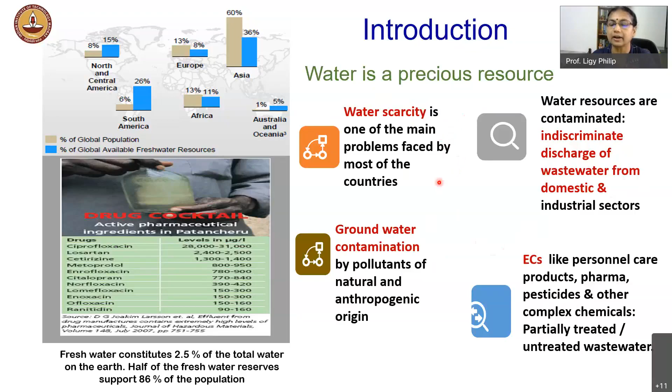There are also water intensive industries like textile and tanneries, with problems regarding water availability and treatment of complex wastewater, where both quality and quantity come into picture. And in rural and peri-urban areas, unprotected surface or groundwater is used for drinking purposes, and most of these sources are contaminated.

When we talk about rainwater and groundwater recharge, the hydrogeology of the locations plays an important role. There is also significant loss of water in distribution systems, and flood and drought frequencies are increasing due to climate change effects. Appropriate management strategies for stormwater to augment water resources are lacking. So if you want to count the problems, there are numerous. There is an urgent need for sustainable management of water resources to provide adequate quantity of good quality water for all - both quantity and quality are very essential.

So when we talk about water and sustainability, water is an integral part of sustainable development.

We all are talking about sustainable development goals and all the things. Water is directly linked to 3 of the sustainable development goals set up by the United Nations: clean water and sanitation, sustainable cities and communities, and responsible consumption and production. All these things are coming under the SDGs set up by the United Nations.

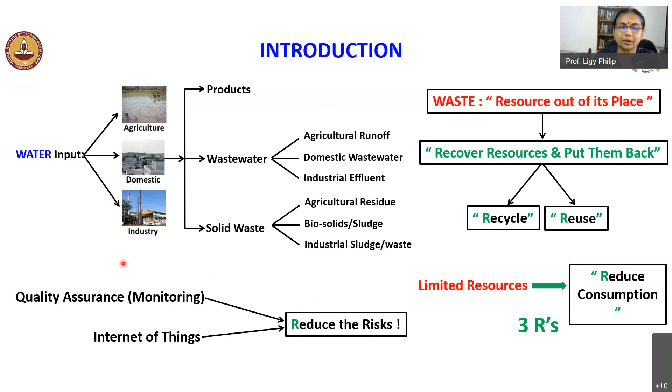But when we talk about recycle and reuse, there is a lot of risk associated with that, because a lot of residual pollutants may be present. So quality assurance through monitoring is very essential. When we talk about monitoring and sensors, Internet of Things and all are coming into the picture.

So, water is interconnected with agriculture, industry, and domestic use, so an integrated approach is essential. Building resilience and reducing risk is essential, and compartmentalization does not work. If I tell you that I am going to work only on wastewater, it is not going to work - we have to have an integrated approach.

So when we talk about sustainable water management, we have to look into agricultural water supply, its quality and quantity for domestic and industrial use, domestic wastewater treatment, industrial wastewater treatment, water distribution, sensors and actuators, integrated water infrastructure, sustainability, resilience, risk reduction, etc. It is a highly interdisciplinary area.

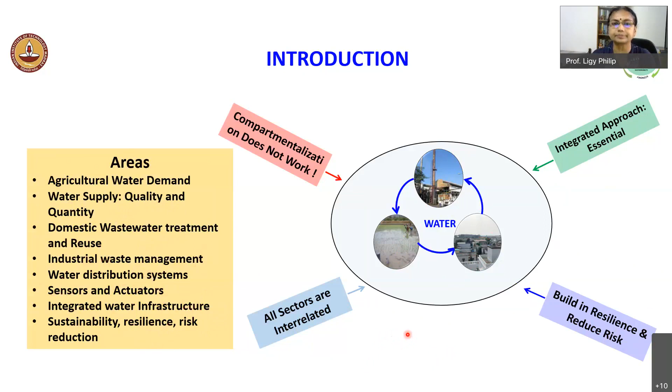So, circular economy for sustainable water - recently we got a prospective Centre of Excellence from IOE of IIT Madras. So we are planning to look into sustainable management of water in a circular economy concept. I'm not going into the details of this one.

So you have rain, surface water, and groundwater treatment - you monitor the quality and all. Then it goes to industry, it goes to domestic purpose, it goes to agriculture, and many other ingredients are added to each thing, and waste is generated. You treat it back, put it back, and the complete resources are recycled within these 3 compartments.

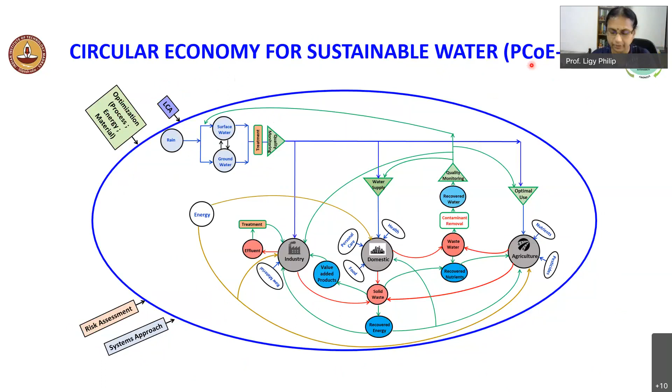And we have to have a systems approach, risk assessment, optimization of the process, energy, material, and life cycle analysis - all these things are needed. This is what we are looking at as part of our PCOE. And as I told you, it is an interdisciplinary problem - we have to have advanced materials, understand the science involved, the technology, and we will be developing a lot of products, which is essential.

Then, we have to take it to market, or if you are developing some technology implementation, social benefit - all these things are needed. So a large group of person skills are needed. We have another center which involves some 9 institutes with IIT Madras leading the effort.

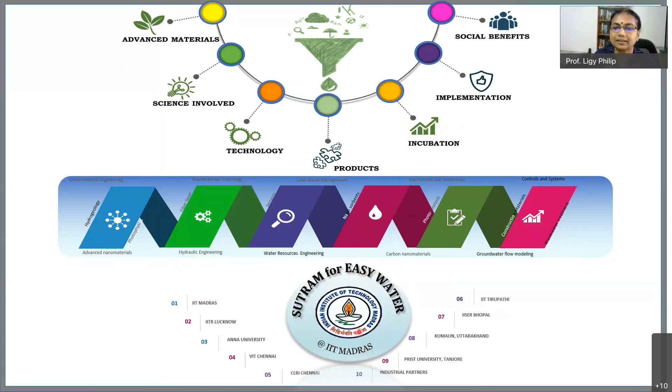This is known as Sutram for Easy Water. It is a Centre of Excellence supported by the Department of Science and Technology. So what we are doing here, I'll quickly go through.

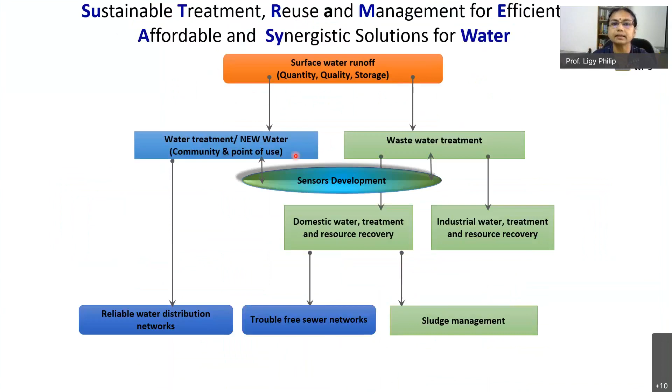Overall, for water management, we are looking into sustainable treatment, reuse, and management for efficient, affordable, and synergistic solutions for water. We have to look into surface water, runoff, quality, quantity, storage, water treatment, new water, community point of use, wastewater treatment, sensor development, domestic water treatment and resource recovery, industrial water treatment and resource recovery, sludge management, trouble-free sewer networks, and reliable water distribution networks.

Then we have to look into reliable and good quality, sufficient quantity water supply for drinking, nutrient recovery, biogas recovery, and salt management. So all 9 institutes are looking into all these aspects.

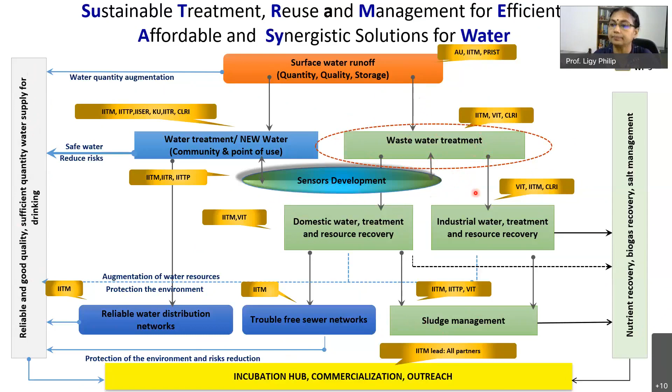Okay, we have done significant amount of work in this aspect. But today's talk, I'll be majorly concentrating on wastewater treatment, and how we can follow this circular economy concept for sustainable water management, with wastewater as a case study.

So the current wastewater treatment scenario is like this. We are generating the wastewater, collecting it, treating and disposing it. Reuse and recovery is very, very little. Though in paper it is there, in actual practice it is very little. Treatment compliance also, in most places it is not meeting standards. Mainly only primary and secondary treatments are there, and the residual pollutants, nutrients removal, etc. are not taking place at all.

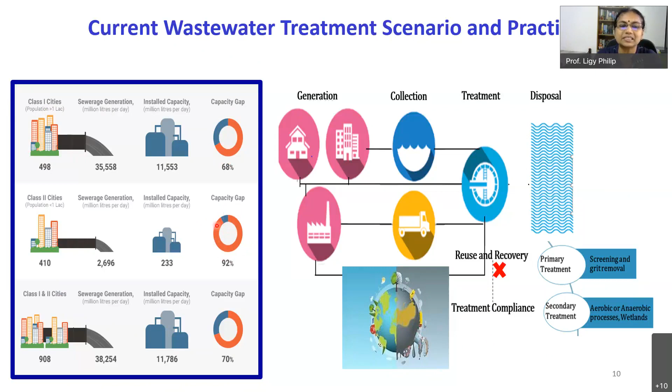So as a result, what is happening? Our water resources are getting contaminated with residual pollution because of the discharge of partially treated and untreated wastewater. If you see the infrastructure available in class 1 cities, we are able to treat around 32% of water, and 68% goes untreated due to capacity gap. When we come to class 2 cities, the treatment capacity is only 8%, and 92% is going untreated. Rural areas have no centralized system; mostly it is on-site sanitation systems.

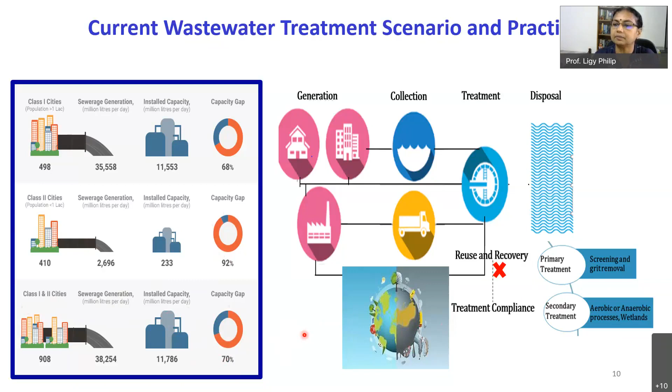Mostly it is on-site sanitation systems. So in class 1 and class 2 cities, even today only 30% of the water is collected and partially getting treated. The other 70% is just getting out without any treatment. So you can see we have water scarcity and we are discharging the wastewater without any treatment. So whatever sources we have, everything is getting contaminated.

But if you look at recovery as an option, we have around 16.6 teragrams of nitrogen, that means 16.6 into 10 raised to 6 tons of nitrogen, 3 million tons of phosphorus, and 6.3 million tons of potassium embedded in wastewater. Recovery from wastewater would offset around 13.4% of the global water demand. And economic gain from recovery of nutrients from wastewater could generate a revenue of around $13.6 billion globally, equivalent to around 75% of the projected industrial demand in 2025. So this much of resources are present in the wastewater, then why are we wasting it?

So here I have shown the potassium, phosphorus, nitrogen, how much is present in wastewater. Around 16.6 teragrams of nitrogen, 3 teragrams of phosphorus, whatever I have put it. So if we recover this, so much of resources we are saving.

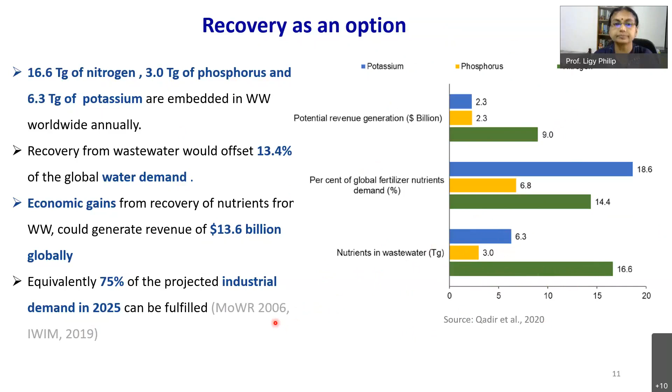So what are the research problems we are trying to address? In the wastewater sector: grey water for agricultural and other secondary uses, how can we treat them? Appropriate technologies for recycling, nutrient and energy recovery, how is it possible? Is it possible to recover all the resources? Appropriate technologies for removal of emerging contaminants and residual pollution, sensors and IoT for continuous quality monitoring, sustainability assessment of processes through LCA, and risk assessment. So these are the things we are looking into.

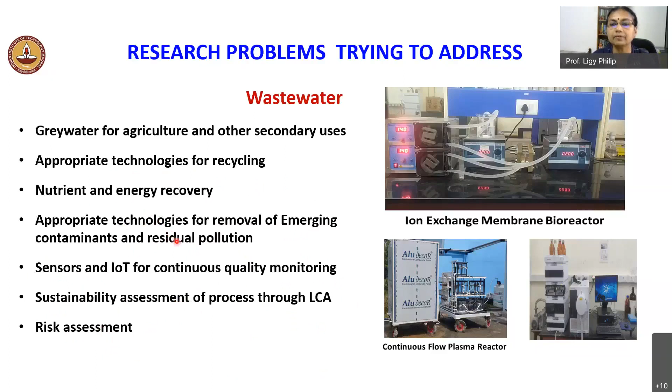So quickly I will go through some examples to give an idea. A few examples of closed loop sanitation systems developed by our group, for sustainable water management, what we do at IIT Madras. It's a circular economy concept, because when we treat, we have to start from home. So that's what we thought.

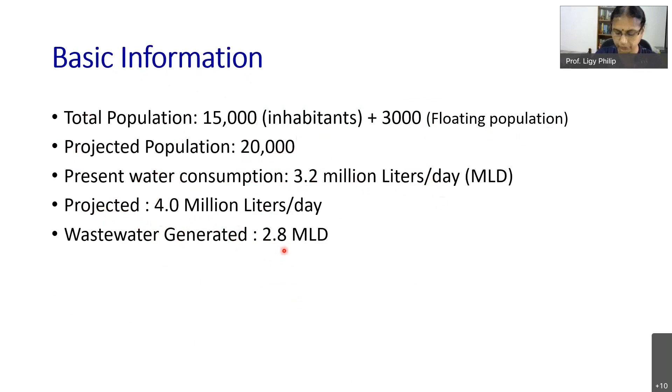At IIT Madras, the total population is around 15,000 with 3,000 floating population. Projected population is around 20,000, and we consume around 3.2 million liters of water per day, with projected consumption around 4 MLD, and wastewater generated is around 2.8 to 3 MLD. So what we are doing is we have a wastewater treatment plant with state-of-the-art treatment technology, with tertiary treatment, ultrafiltration and ozonation, and sludge treatment.

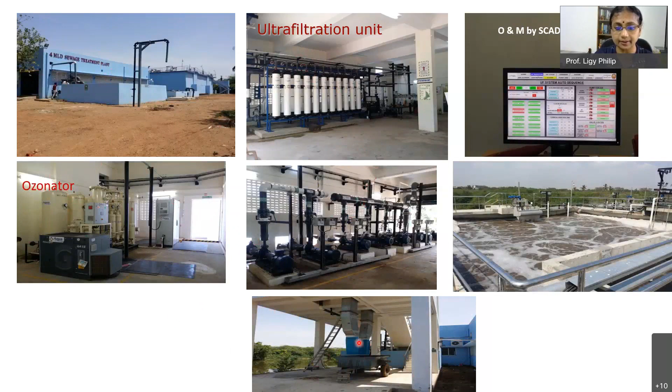So what we are doing is, whatever the treated water is, we are 100% reusing it. We are not even sending a single drop of water out. Some water we are using to refill the lake, where a lot of aquatic organisms are there. In our campus, we have a dual pipeline system, so we are using only this treated wastewater for complete toilet flushing, gardening, and water for air conditioned cooling.

That, many places they may be doing. So still there will be water left over because we are not using it for drinking purpose or anything. So what we are doing is the leftover water, we have a filtration well. You can see that it has around a 3 meter sand bed.

Through that one, it is getting filtered again. Then we have an infiltration gallery, and through that gallery, it is getting into our lake. In the lake, we have put a water treatment plant with coagulation, flocculation, filtration, and activated carbon filtration, so any residual pollution is removed. This water we are blending with our municipal water supply.

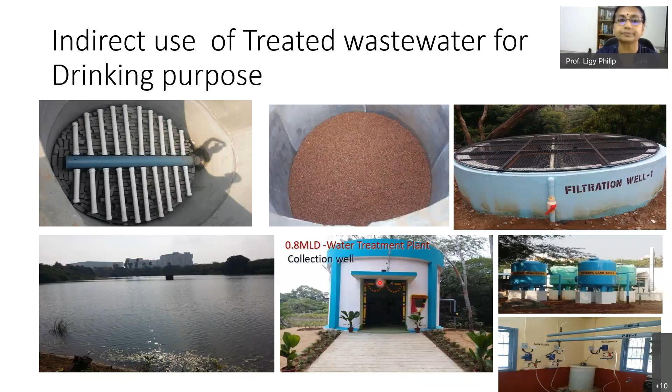So what we are achieving is, the total cost of the STP is around 10 crore, and pipeline and all costed around 4 crores. But we are saving more than 2.5 crores on water bill itself every year now. That means we are able to recover the total cost of the STP in 4 years.

Not only that, we have too much of intangible benefits, because whenever the city has a water problem, our campus never ever faces that issue. So wastewater treatment plants are not a cost, it is a water generating machine. If you start looking into it that way, it will be very, very good.

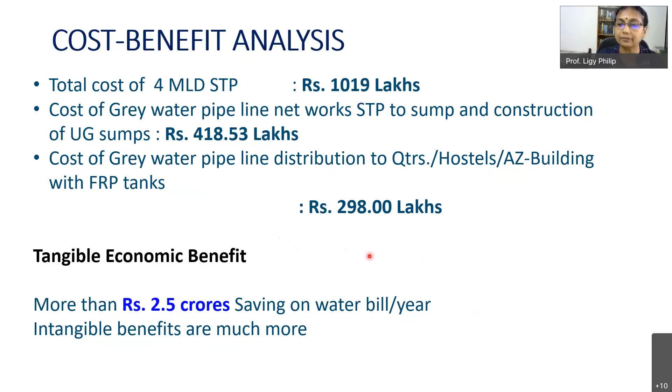So whatever we have done in the IIT campus, many people have seen it and wanted to put the same system. Even the government has started doing it. Chennai Metro Water and Sewerage Board is planning to recycle water for domestic supply. Already industries are using the recycled water, as you all know.

Already 2 numbers of 10 MLD plants are constructed, exactly the same way as what we have done in the IIT campus. They have constructed 2 plants in Chennai city and are planning to put another 260 MLD recycling system. We are providing all the technical advice and other things to the CMWSSB.

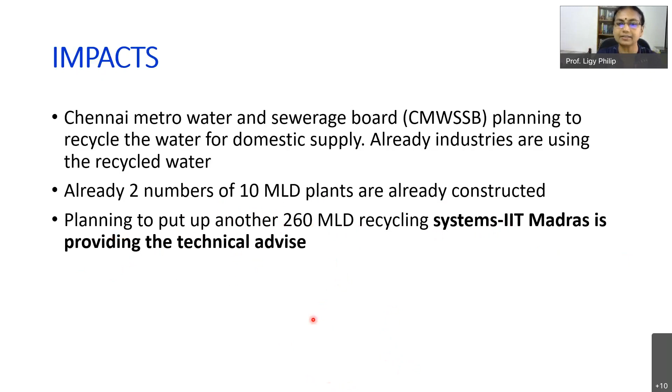What I'm trying to tell is, if you make something and show it as a successful story, so many people will follow this, and that's the way we'll be able to convey our sustainable management of water principle.

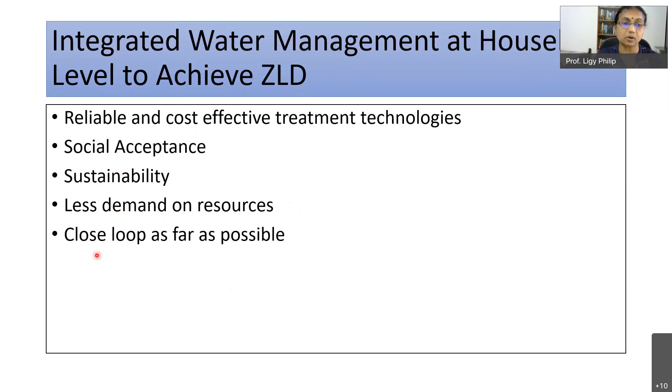Another thing we are looking into is integrated water management at the household level to achieve zero liquid discharge. Is it possible to make a home zero liquid discharge? We have to have reliable and cost-effective treatment technologies. They should be socially acceptable, sustainable, less demand on resources, and we have to look at closed loop as far as possible. This is what we are working on.

We know that a household per capita water demand is around 150 to 200 liters. So in that 200 liters, is it possible to recycle within the system and supply only 50 liters of fresh water? That means out of 200 liters, you supply only 50 liters of fresh water, and the remaining 150 liters you recycle within the house itself.

Because for drinking, cooking, etc., we cannot compromise on the quality, so here you always supply fresh water, whereas for bathing and laundry you reuse the water. Whatever additional is needed, you supply fresh water. But when it comes to non-recyclable purposes like cleaning, gardening, toilet flushing, etc., use only recycled water, because we don't need very good or drinkable quality water for that.

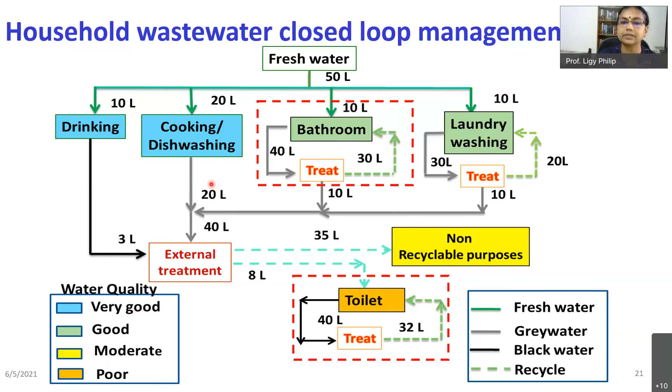So this is the principle we are looking into, whether we are able to achieve this. What we have done first is look into the grey water recycling. In the campus itself, we have looked into different households, how they are, what is the water consumption and what is the grey water generation, and we have collected all the data.

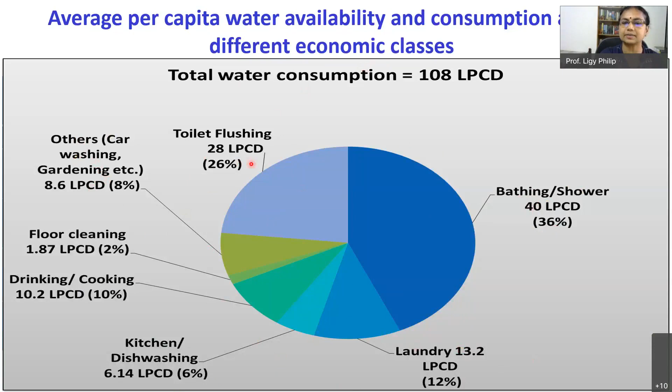You can see that a significant amount of grey water is generated in each house. If you see, bathing takes around 36% of the total water, toilet flushing 26%, and car washing, gardening, etc. 8%. This is the average IIT water consumption pattern based upon the survey we have carried out.

When we talk about grey water recycling and reuse, everybody thinks it is very, very easy. But we may have to be a little more careful, because there will be many other emerging contaminants present in the grey water. When we collected our water and analyzed it, we could see 78 different organic compounds in the grey water, and 17 compounds registered as fragrance products. Then we could see pharmaceuticals, preservatives, emulsifiers, surfactants, all these things.

So all these compounds are there. When we talk about reuse and recycle, we should be aware of this, otherwise we'll end up in a problem. Without removing these, if you use the water, then there is a risk. So we have to be extremely careful.

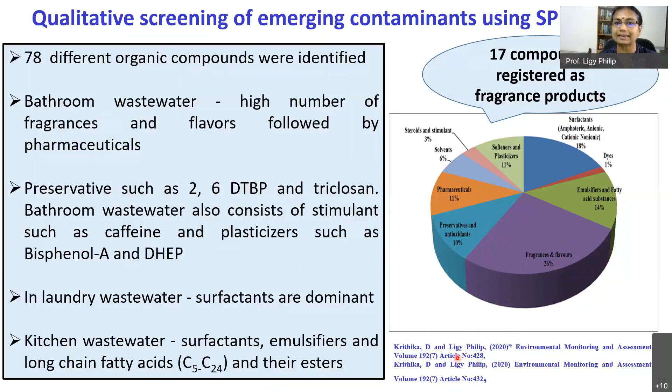So we looked into complete characterization and all. Then what we did is, is it possible to reuse the water collected from a bathroom and reuse in the bathroom for bathing purpose itself? That is what the first system we were looking into. So we collect the grey water from the bathroom and the wash basin, that's all.

Then we looked into various treatment technologies and optimized that one. So this is the flow scheme: grey water, coagulation, flocculation, and disinfection, then ultrafiltration. Up to here, the water will be suitable for toilet flushing and gardening. Then you may have to give a specified adsorption system if you want to reuse it for bathing and other secondary non-potable applications, because this is essential to remove the emerging contaminants.

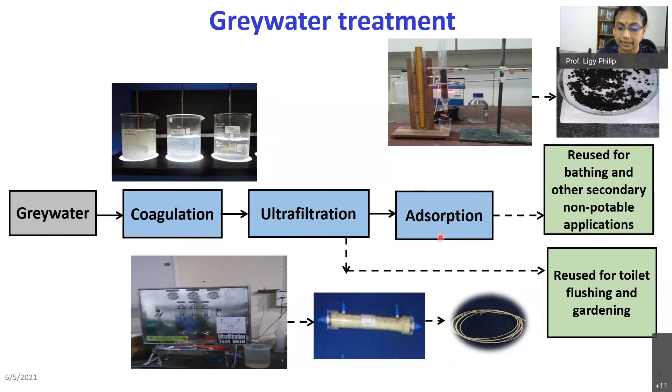So what we have done is this: all the water collected is stored, then treated, and supplied back. We also did a lot of research modifying the ultrafiltration membrane, etc.

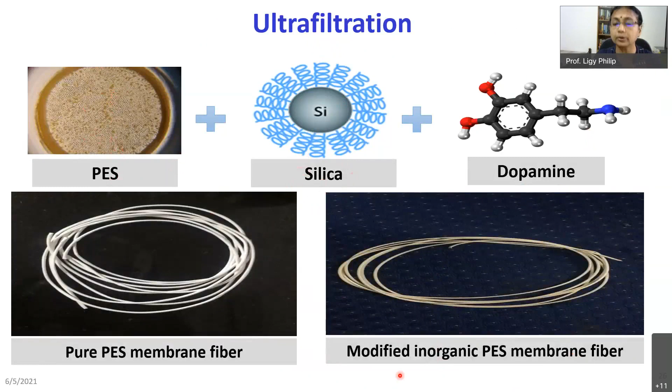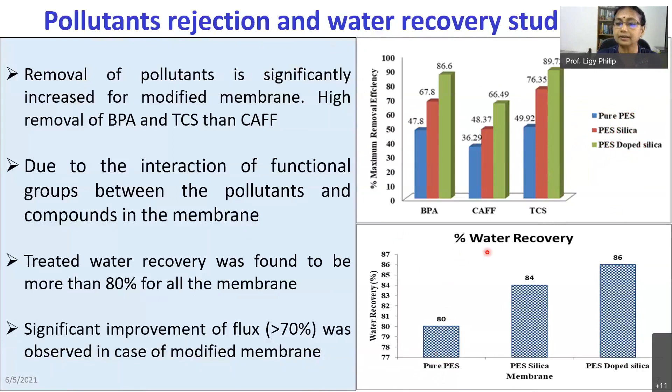The available PES membrane was modified with silica and all, to increase the hydrophilicity and the recovery. So pollutant rejection and water recovery studies we have conducted with pure PES membrane, PES impregnated with silica, and doped silica. So we could get much better water recovery and all. So this is the research part.

Then we also developed some adsorption material, because when we talk about these pharmaceutically active compounds, personal care products, etc., many are hydrophobic, some are hydrophilic. So if you take only activated carbon or similar adsorbents, they will be able to remove mostly only hydrophobic compounds, so hydrophilic compounds will be left over. So what we have done is tailor-made an adsorbent capable of adsorbing both hydrophilic and hydrophobic compounds.

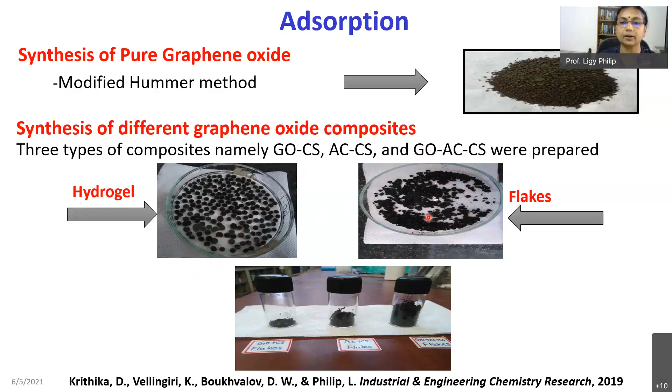So it is a graphene oxide, activated carbon, chitosan type of material, and it has very high adsorption capacity. So we have looked into different types of emerging contaminants and seen how this composite adsorbent is removing various pollutants.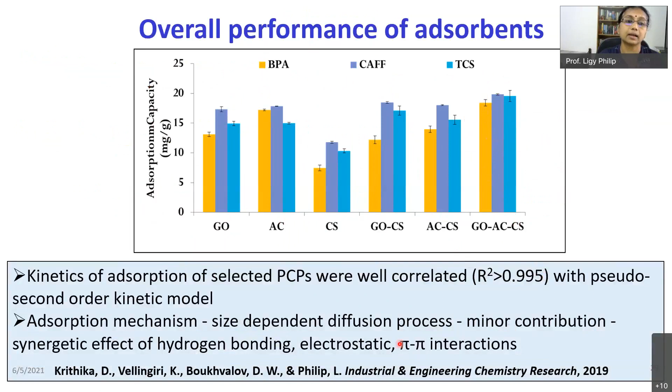And not only that, we have developed our own sensors, because whenever we do this type of recycling system, unless you assure the quality, it will be causing some sort of risk. So we were monitoring the quality with respect to color, turbidity, ORP, etc.

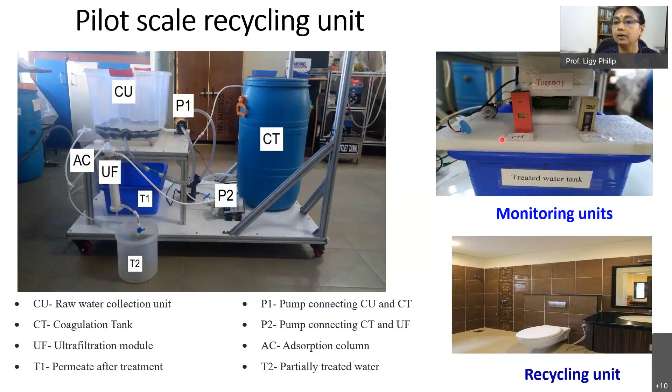We are still working on that one, because we could see that some COD is coming in the treated water. So we have modified that with some biological system followed by coagulation and ultrafiltration. So the load on adsorption is reducing significantly.

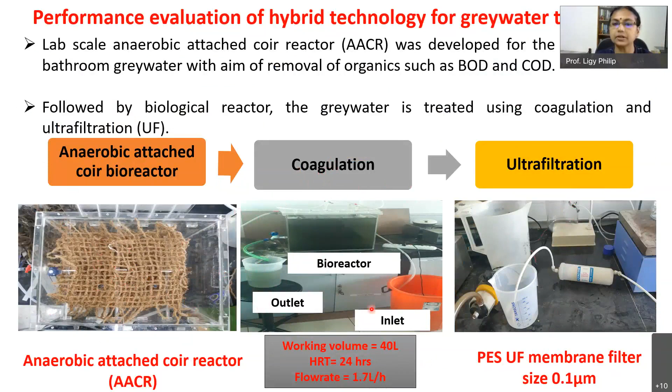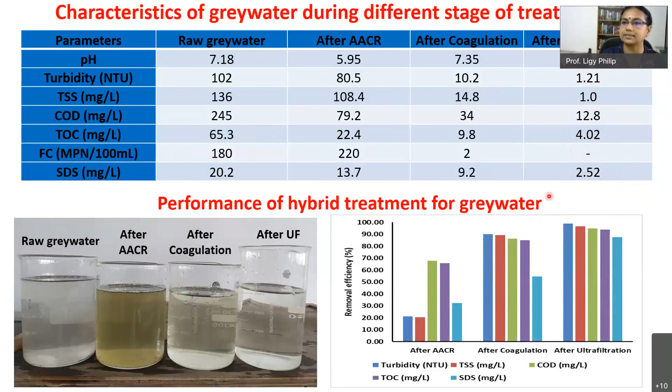So you can see that after ultrafiltration itself, your turbidity is 1.21, TSS is 1, COD is less than 12.8, TOC 4.02, fecal coliform nil, and SDS 2.52. So this SDS and all, if you want to remove, you have to use the adsorbent system. So this is what one thing we have developed.

Another thing, using the same principle, we were looking into is it possible to recycle the water in a washing machine? Because a washing machine uses each cycle around 45 to 60 liters of water. So within that 10 to 12 minutes, if we will be able to treat the water and supply it back to the washing machine, there will not be any problem for people to psychologically accept that water, because it is not mixing with the toilet water and all.

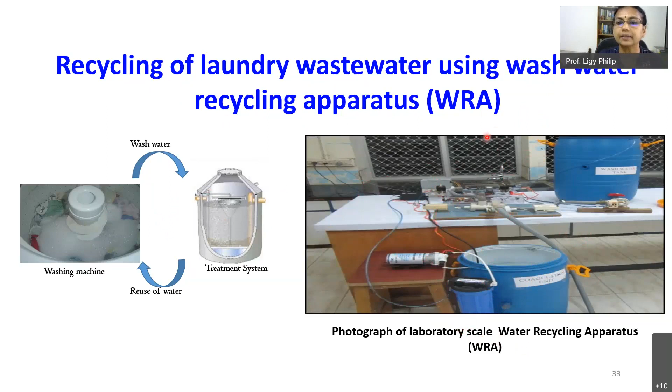So we have developed the system, with all the sensors and controls, and pilot scale also we developed, and we have transferred the technology to some industry. They have made the prototype, but it has not yet come to the market, because their market survey showed that only Tamil Nadu and one more state are ready to buy it. So the products have not yet started, but this is what we have done.

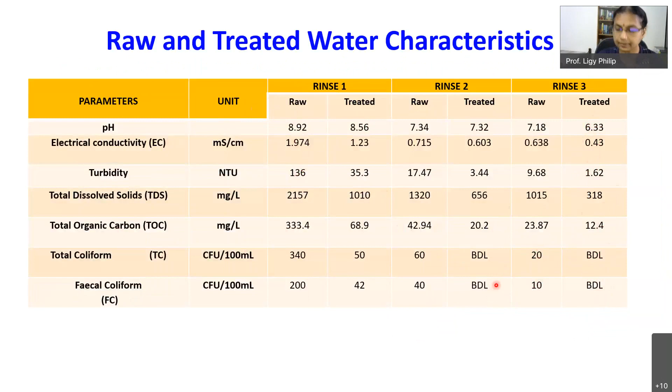So you can see that the treated water meets almost similar quality to the drinking water, the tap water. Here also it is simple coagulation, flocculation, disinfection, and ultrafiltration. So what I am trying to tell is, with simple methods you will be able to recover a lot of water and make the system sustainable.

And another thing we have looked into is zero liquid discharge toilet-segregated black water treatment. Here, we are not modifying anything from the toilet. You just put a strainer, separate the solids and liquid, and then the liquid you vacuum distill.

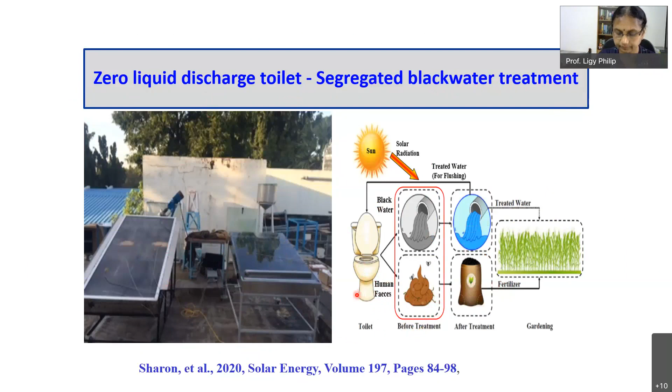So this toilet, for example, is free of any discharge. Whatever water you are using, you are able to recover, and the solids come out as fertilizer. So you don't have to give any water, and no electricity from the grid is needed, because everything can be operated through solar power.

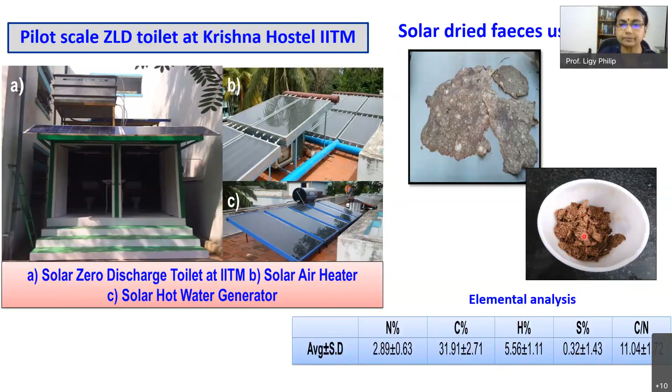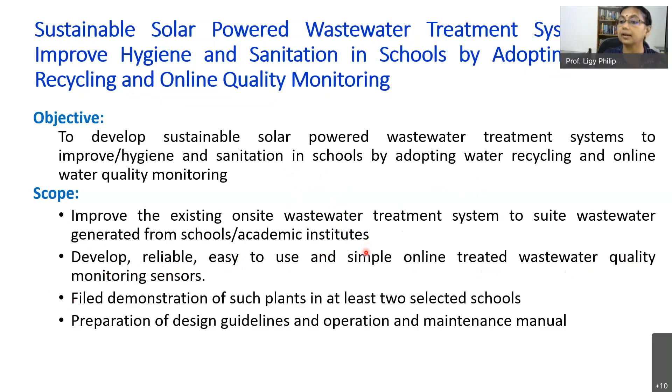Then another system we have developed is a sustainable solar powered wastewater treatment system to improve hygiene and sanitation in schools, by adopting water recycling and online quality monitoring. Because many schools have problems with water, and many girls suffer because schools have toilets but water is often not available, so they don't want to go to the toilet. So we wanted to develop a reliable, easy to use and simple online treated wastewater quality monitoring system and a treatment system which doesn't need much maintenance.

So that is what we have done. We have done a lot of lab scale studies.

Water will go here, then to a submerged attached growth biological system, which is an aerobic system, then a filtration system and disinfection. And the way we operated it, this system will work - the aeration will work only during sunlight, because there is no battery, nothing. So 9 a.m. to 4 p.m. only the aeration will work.

At that time, whatever residual COD is present will be getting removed and ammonia will be getting converted to nitrate. During night time, a part of this wastewater that has not gone to the modified septic tank will come here, so you have anoxic conditions and denitrification will happen. So you will be getting water free of carbon and nitrogen, then you filter it and use it.

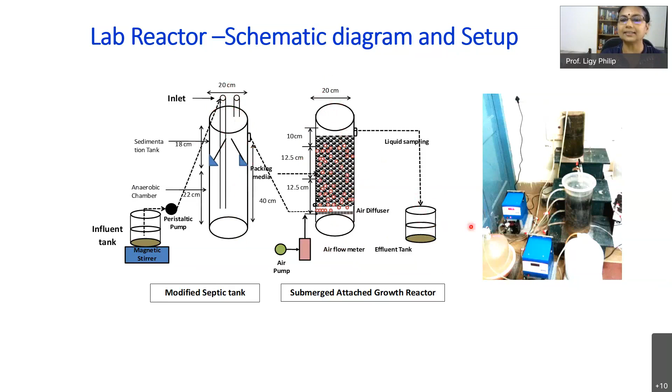And we developed our own sensors to look into the color, turbidity, ORP, etc., because online sensors available in the market are very costly. So we developed our own sensors so that at any time we can monitor the quality and make sure we are supplying only good quality water. If the quality is not meeting standards, it will be flushed to the ground.

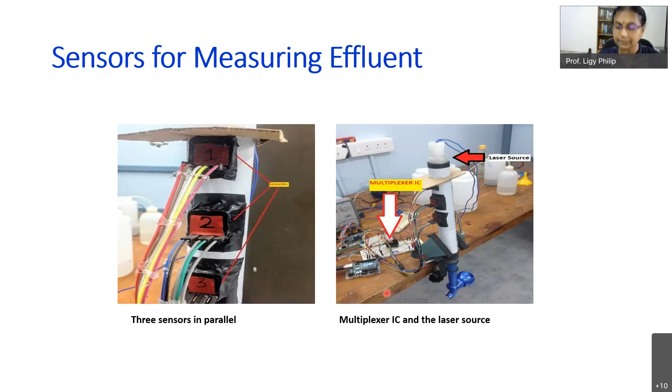So we didn't stop there. This is the schematic diagram of the field scale unit. You have the modified septic tank, submerged attached growth biological filter, then filter feed tank, then your rapid sand filter, and your sensor. This sensor will tell whether the treated water is meeting the quality or not.

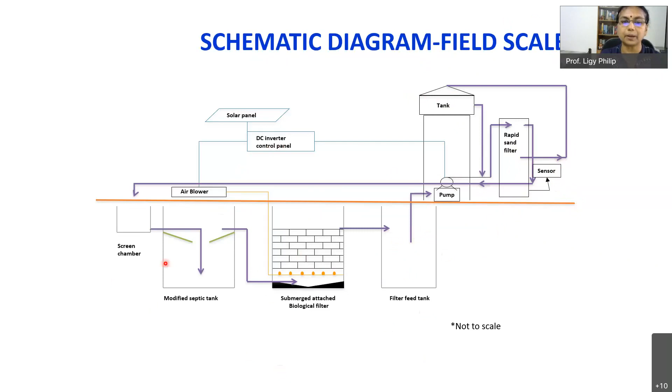If the quality is met, the water will be pumped to the overhead tank. If it is not met, it will go to the drainage system. So that's the way we have done it. And the space occupied by this unit is only equivalent to a normal septic tank.

So we have put two of these - one in KV school with more than 1,000 students capacity, and you can see the area occupied is just similar to a septic tank. Another one we have put in Vimala Convent School, Chennai, where also more than 1,000 students are there. And we have transferred the technology to some private firms also now.

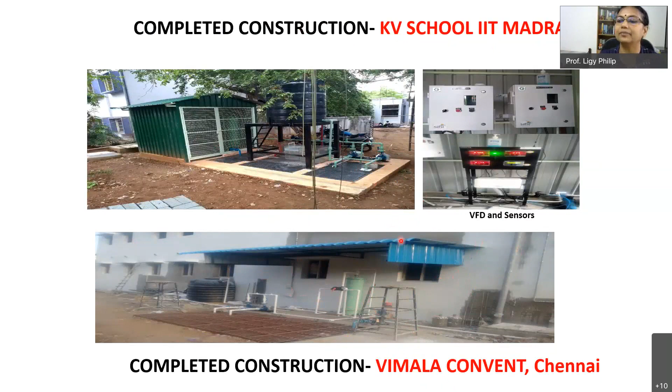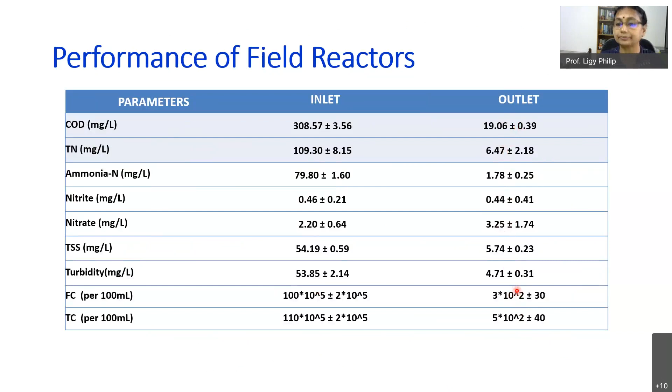And this is very simple, and we are able to get the water without much problem. You see the outlet quality - it is meeting all the requirements, all the standards specified by the enforcing agencies. So that is about the system.

So now we are also looking into nutrient recovery, because when we do the treatment, many times when we talk about nitrate, phosphate, etc., we try to remove it and throw it away. So is it possible to recover the nitrate and reuse it? Now we are looking into nitrate removal using ion exchange membranes.

So you can see that the nitrate concentration in the feed will be getting reduced, and the receiver compartment will be getting concentrated. So you will be able to concentrate the nitrate and get a concentrated nitrate stream and use it as a fertilizer, or if you want to denitrify it and remove it, you can do that.

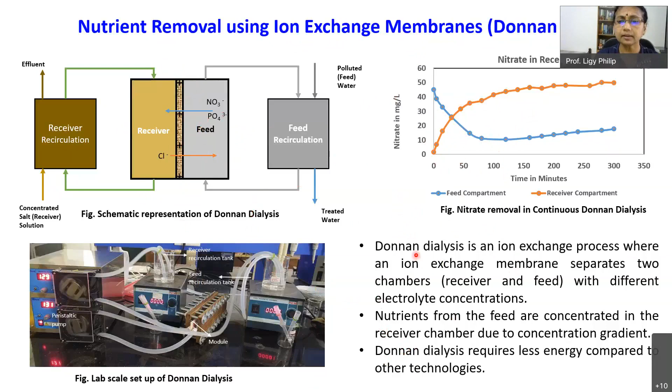Similarly, we are looking into phosphate, sulfate, etc. We could see that our membrane is able to concentrate phosphate, nitrate, sulfate, etc. in the receiving stream. So this can be used as a tertiary treatment system, and also as a resource recovery system. We are working on this, and we have a collaborative project with EU countries.

Then another one we are looking at is electrosorption for nitrogen and phosphorus removal and recovery. So we are looking into MOF, metal organic framework.

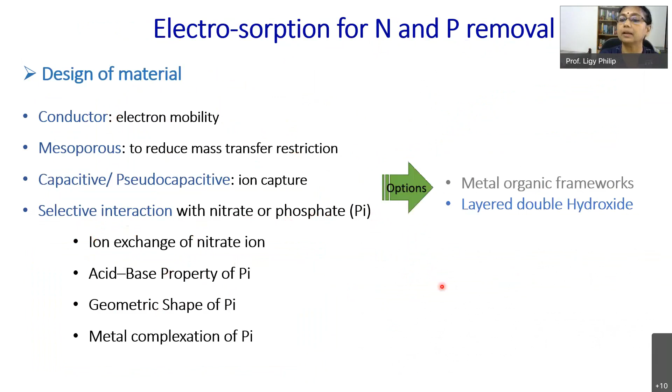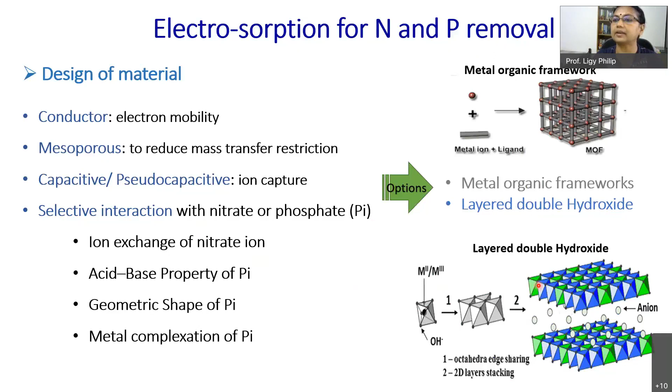So ion exchange with selective interaction with nitrate or phosphate. In these systems we are looking into metal organic framework and layered double hydroxide. So how can we separate in these systems? This system should have specific affinity to nitrate and phosphate, otherwise all the anions will be getting removed. So we are looking into that type of thing.

So metal organic framework as capacitors also we are trying. We are using aluminium, iron, zirconium, etc. as the metal ions for this purpose, and phosphorus will be getting removed. So how can we concentrate the phosphorus solution and all that - that's what we are looking at.

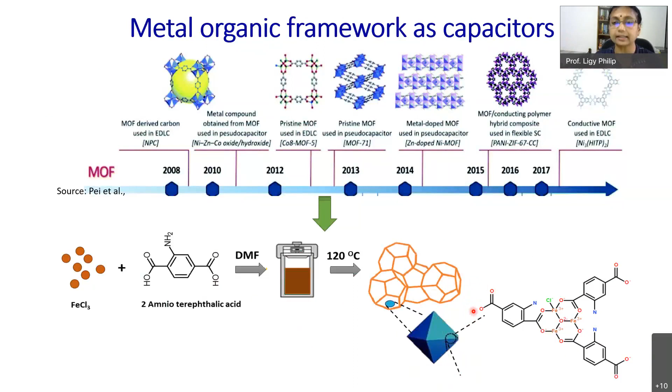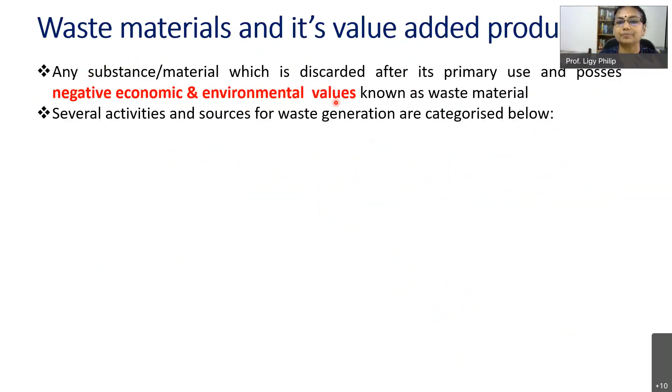Another thing - we are also making many waste materials into value added products. Any substance material which is discarded after its primary use, having negative economic and environmental value, is known as waste material. But we feel that there is no waste material - everything can be made into value added products. So what we are doing is collecting different types of agro waste, shell waste, industrial waste, sludge waste, and converting them through conventional pyrolysis, microwave pyrolysis, or hydrothermal carbonization.

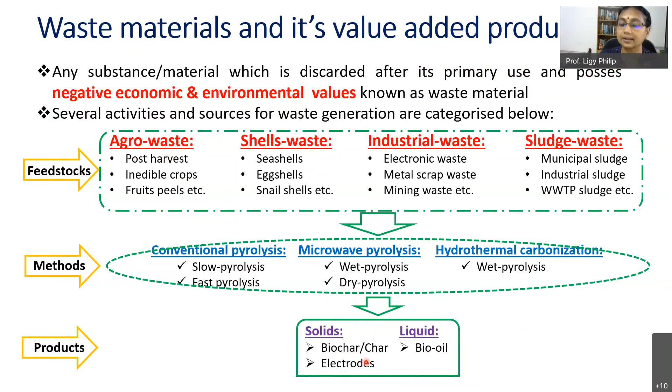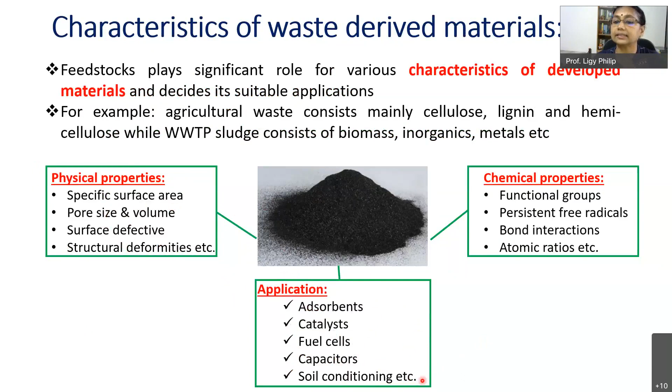We get solids and liquids as value added products, like biochar, which we use as electrodes, and bio oil. Then we do characterization of all these materials. We have developed many of these materials, and our collaborators are also making them. We are looking into the physical properties and using them as adsorbents, catalysts, fuel cells, capacitors, soil conditioners, etc. So this is one such example.

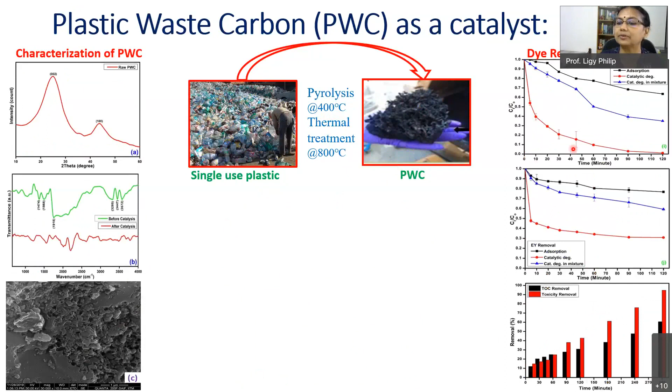Then we have looked into dye removal. Just using the PWC for dye removal, it was not very great - yes, it is removing something, but it was not great. So what we have done is started using this one as a carbocatalysis process, as the carbon material.

So PWC proved to be an efficient catalyst for activation of peroxymonosulfate for simultaneous degradation of cationic and anionic dye, because this carbon surface enhances sulfate radical generation when we use this peroxymonosulfate, and it enhances the activation. We could see that the catalytic efficiency is found 3 times higher than sorption capabilities.

So like that we are developing many value added products from sludge, and we could also see that not only organic substances - if you mix inorganic sludge along with organic sludge, the carbon you are getting has much better characteristics as an adsorbent or catalyst support.

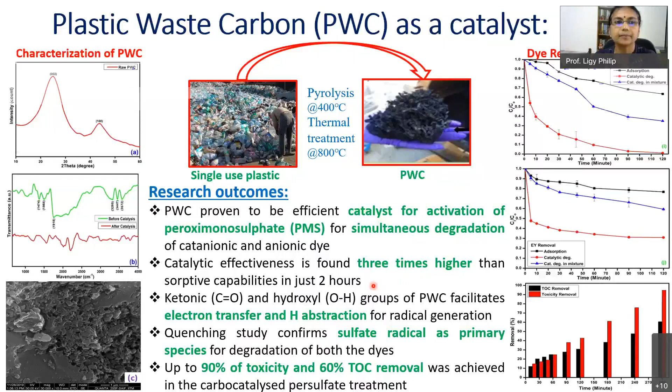So until now I was talking about research in the urban setting - how can we do sustainable waste management and resource recovery. Whatever technology we are developing, we can apply to villages also, and we should do it, because unless we get into the villages, India will not be progressing as much as we want to. So I'll talk a little bit about the village for another 5 minutes.

If you go for sustainable waste management and resource recovery for a clean and healthy village, we can achieve improved cleanliness and hygiene on a sustainable basis, health improvement, protection of water resources from contamination, and increased water availability.

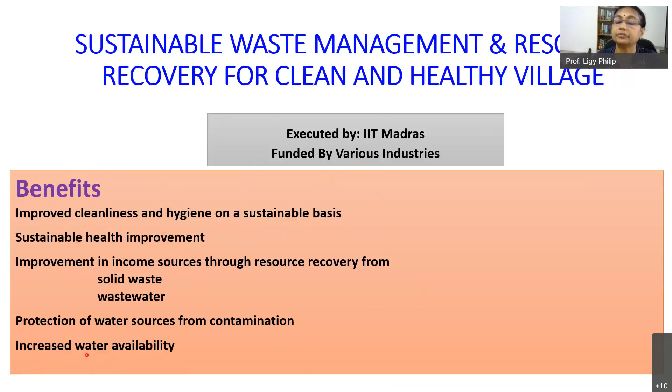I will show the case of one village, one of the villages in North Chennai, just on the outskirts of Chennai city. We went into the village, trained them, did a lot of communication with them, awareness programs, everything.

Then we taught them how to segregate and collect waste, and we constructed a composting plant, teaching them the process. The technology was developed at IIT Madras, and this composting takes only 18 to 20 days to get good compost. The villagers themselves are doing the composting; we trained some 6 to 10 people. They handle all the biomedical waste like napkins using an incinerator, and sort out inorganic wastes for selling. Around one-third of the entire cost is recovered from selling the inorganic waste and the compost.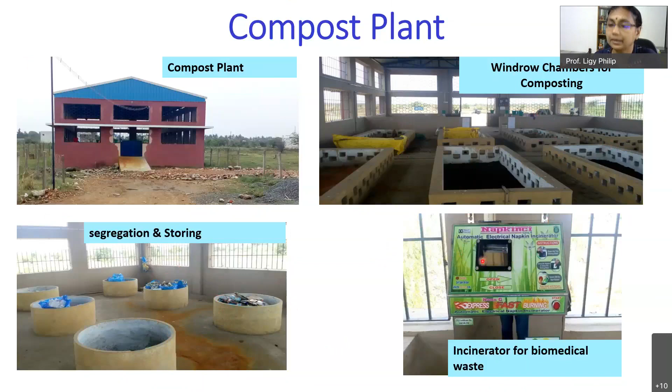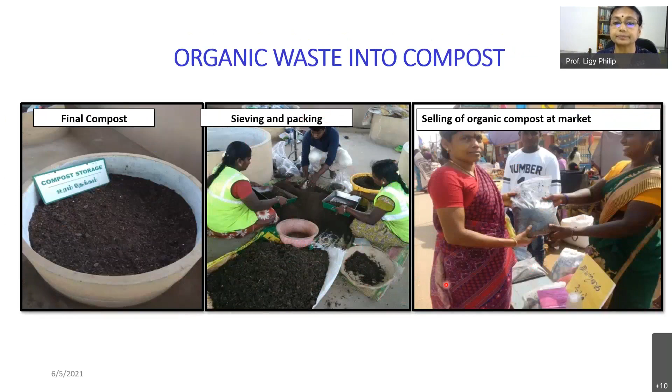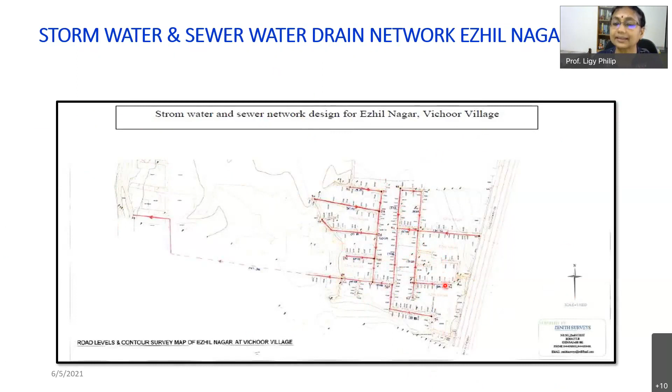For liquid waste management - in any village you can see a lot of grey water accumulating everywhere, creating a very bad scenario. So we surveyed the entire village and designed a drainage system, because they didn't have any drainage system even for rainwater collection. Nothing new here, this is the drainage system.

What we added in addition to the normal drainage system is another pipeline - you can see a PVC pipeline. This PVC pipeline collects all the grey water from each house in the village, plus the effluent coming out of septic tanks - everything is collected through this PVC pipeline. We call it a small bore system, and the cost is very low because it's in the drain. Whenever rain comes, the rainwater passes through this and doesn't get contaminated, because all the solid waste is managed properly, and the liquid waste is collected through a closed conduit, so it doesn't get mixed. All the rainwater goes into the existing pond or lake, which we have cleaned.

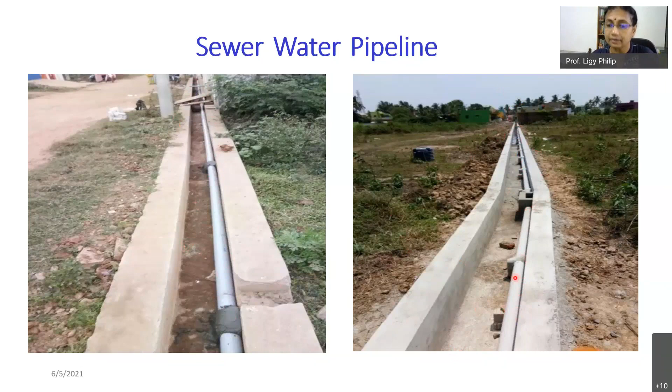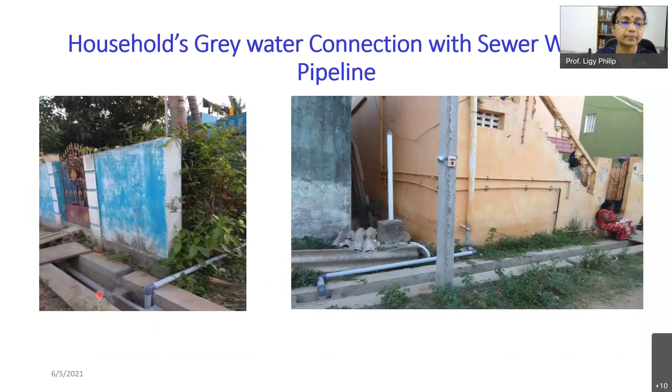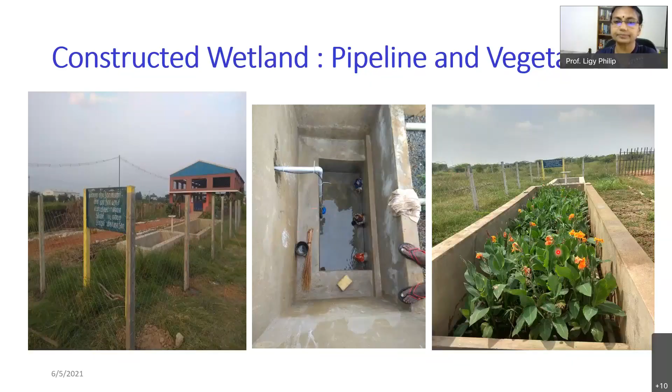They are storing all the water there, and their groundwater level has improved significantly. For the collected wastewater, each house has a chamber where it collects, then goes into the small bore system. We couldn't put any mechanized treatment system because it's a village and people aren't knowledgeable about treatment. So we decided to provide a constructed wetland with a septic tank before it - initially we assumed only 100+ houses would connect, but many more got connected, so the constructed wetland alone wasn't able to take the load. So we have a septic tank, then the constructed wetland, which is giving proper treatment.

Many times when we talk about village projects, students' first question is: are we going to get good research papers? Are we able to do our research with these projects? Yes, that's why I put these slides - with that village project itself, we have done a lot of in-depth research. We looked into different matrices for the constructed wetland, to determine which one would be better for removing emerging contaminants and residual pollutants.

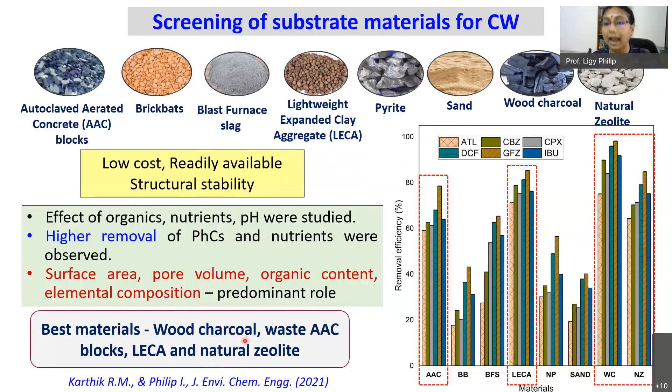So we have done all type of studies, and we could get good publications, and lot of knowledge which can be implemented in the village.

Another thing is, in the village, when we plant something, if we plant something useful, it will be good for the villagers. So most of the time we advise them to use fodder grass.

So when we put fodder grass in the constructed wetland, we should know whether these contaminants are getting accumulated in the plant or degraded. If it is getting accumulated, when people cut the fodder and give it to the cows, that pollutant will enter the milk, and finally it will come back to us. So we have to be extremely careful.

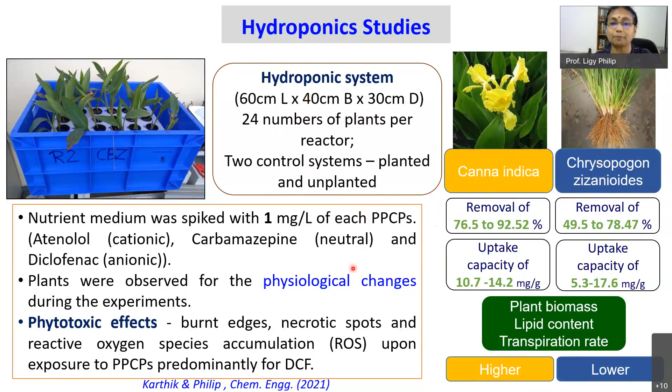So what we have done is lot of hydroponic studies apart from field studies, looking into how each plant is accumulating these pollutants, where it is getting accumulated, and whether it reaches a toxic level. We have done this with different plants like Canna indica, Vetiver, and other plants, and looked into where and how it is getting accumulated.

We could see that, depending upon the nature of the pollutant, whether it is hydrophilic or hydrophobic, cationic, anionic or non-ionic, the accumulation pattern changes. Hydrophobic compounds mostly accumulate in the roots, and if it is highly hydrophilic, it comes up to the leaves.

Now we are looking into what type of metabolism is happening in the plants. Now what I am trying to say is, even village projects can have good research also. So we have looked into all these things and found out the translocation factor.

Finally, we could see that the concentration levels of these pollutants are very little in the plants, because mostly it is degraded by the microorganisms or bacteria present in the system, and the matrices are absorbing it. So not much is getting accumulated, and we don't have to worry much.

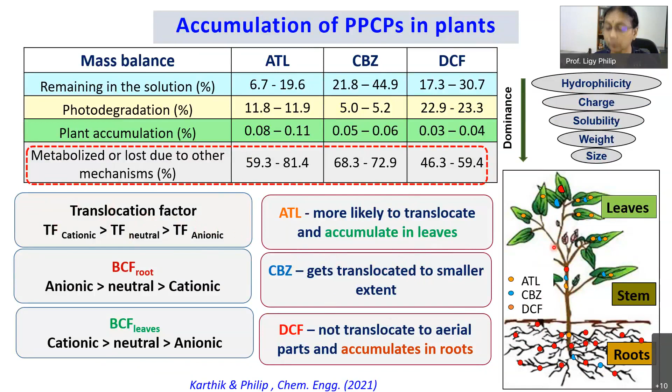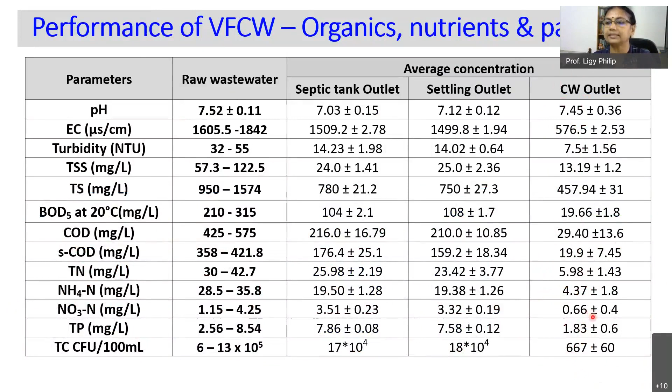So you can see that at the constructed wetland outlet, COD is 29, total nitrogen 5, ammonia nitrogen 4. I am talking about the field level constructed wetland shown earlier. So this is the performance. Even providing a constructed wetland designed and operated properly, you will be able to meet all the discharge standards, and the villagers are using this water for agriculture purposes.

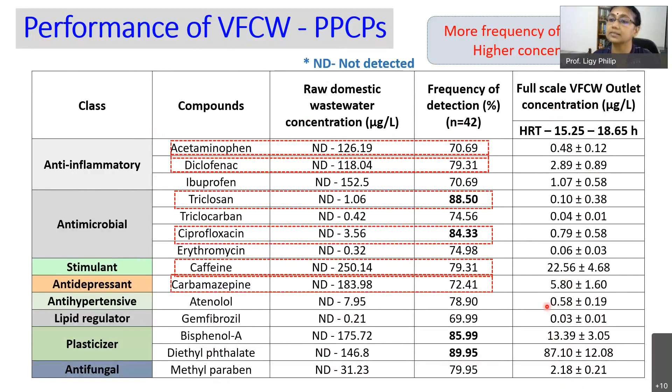We also looked into antibiotics and similar contaminants. You can see how much is coming in domestic wastewater, and in the full scale constructed wetland the concentration has reduced significantly. We also looked into the risk factor, which is less than 1, so it is not much risk to use this water for agriculture purposes.

So that is one village. Similar work we are doing in another four villages, including Singaperumal Koil, and we are very thankful to many industries. We got more than 20 crore grant for implementing these projects in various villages.

Coming to the summary of sustainable wastewater management: waste is a resource, not a problem. Practice reduce, recycle and reuse. Resources are limited, so protect natural resources and reuse wastewater. This will significantly reduce freshwater use. Proper operation and maintenance is essential. Whenever we talk about water management, a wholesome approach is needed, including waste management, not only wastewater but solid waste management also.